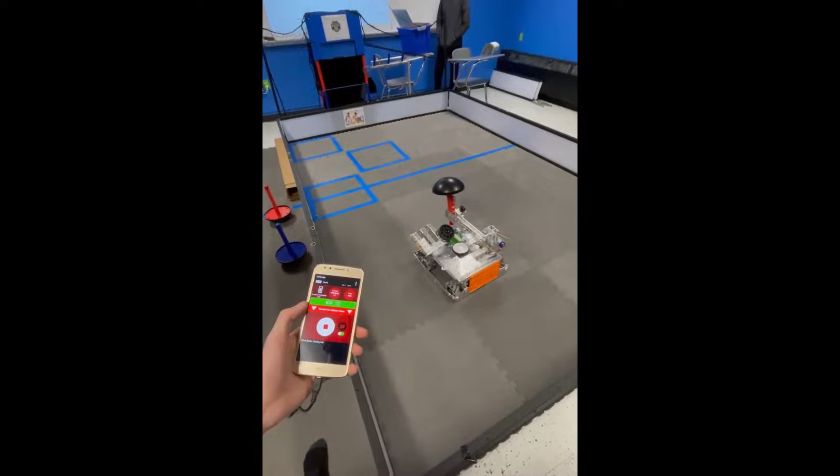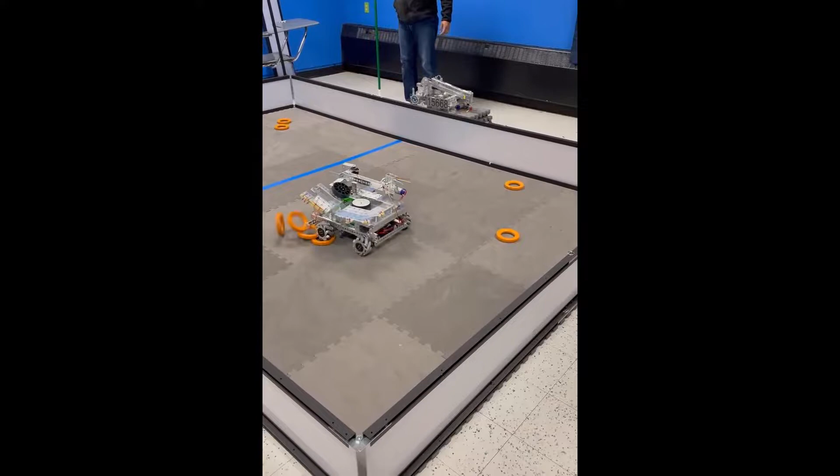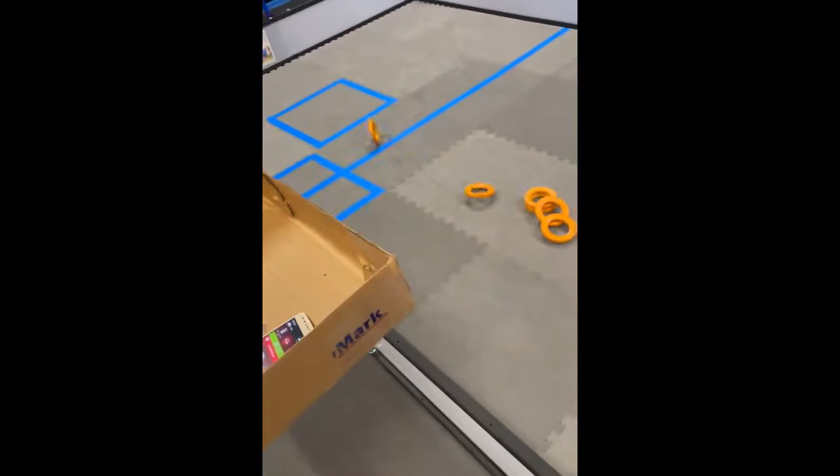Alright, time to watch Disaster Strike. Where's that going? Ram. Okay, I need to go faster than that. Wait, but it might stop. It might stop. Okay. Oh no. Disaster! Disaster already!

Hagerswood Middle School is Rithik Kurup and Chase Creedon. We're former grads, and now we're members of the robotics team for Xavier High School. Our team, the Full Metal Peregrines, Team 17703, are excited to present to you our robot, Monty.

Let's start with talking about what FIRST is. Xavier High School is part of a worldwide robotics league called FIRST, formally known as For Inspiration and Recognition of Science and Technology, which has yearly competitions in 4 different leagues: FLL Junior, FLL, FTC, and FRC. FTC and FRC are the middle school and high school level, FTC being the smaller robots and FRC being the larger robots. Xavier usually has 2 FTC teams and 1 FRC team, but due to COVID restrictions, the school instead consists of 5 FTC teams, the Peregrines being one of them.

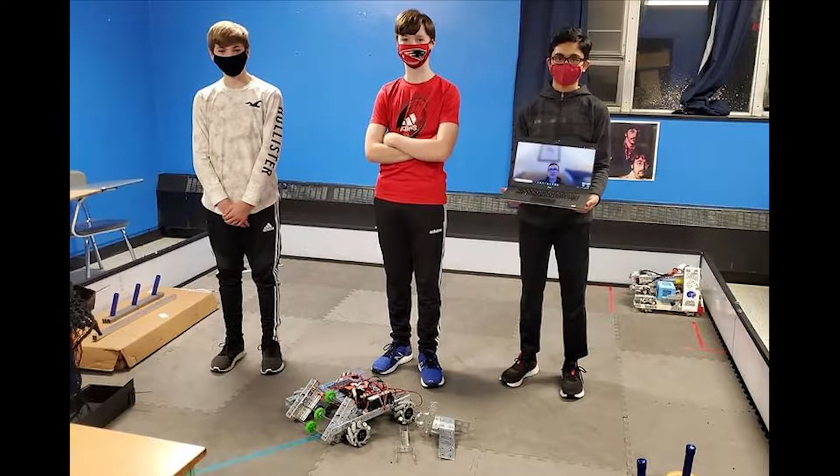For this year's FTC challenge, the robot has to pick up rings and shoot them into different goals, while also picking up a wobble goal and dropping it over a wall. The competition consists of an autonomous period where the robot shoots rings and drops the wobble goal on its own using pre-written programming, and a driver-controlled period where we drive the robot, shoot the rings, and drop the wobble goals ourselves.

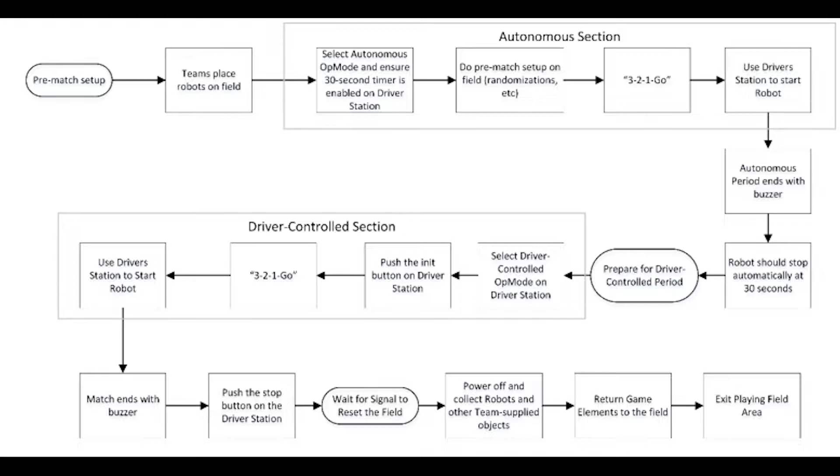The maximum robot dimensions in FTC are 18 inches by 18 inches by 18 inches, while FRC's is 3 feet by 3 feet by 3 feet. There are 3 periods during a match: autonomous, driver-controlled, also known as teleop, and endgame, adding up to 2 minutes and 30 seconds of robot mania.

Autonomous is the robot running by itself to shoot rings through the targets and drop the wobble goal in the indicated zone on the field. The driver-controlled period is pretty straightforward. It is when the drivers control the robot to shoot the rings through the targets. Endgame period is the final 30 seconds of the driver-controlled period. In this period, the drivers control the robot to pick up the wobble goals and move them outside the field.

Gonna have about 10 seconds remaining.

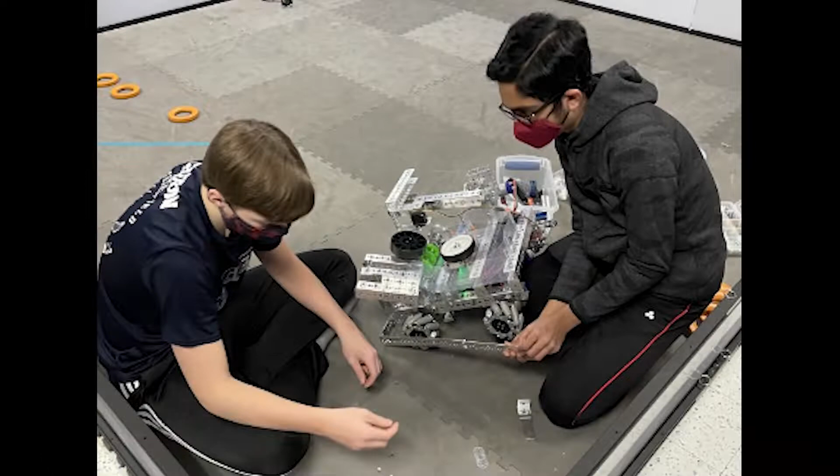The Full Metal Peregrines have decided to name their robot M.O.N.T.E, which stands for Mobile Omnidirectional Neutralization and Termination Eradicator. We were debating on calling our robot Troubleshooter due to how many issues we were having in the early stages of our build. Our build and programming process of M.O.N.T.E took about 4 months to complete, programming taking up most of that time.

So this is the CAD, or computer-aided design, of our robot. Before we actually build the robot, what we do is we create a CAD, a computer-aided design. What this is, it's basically a 3D model of what we're planning to build. That way we have an idea of what we're going to do before we actually do it, and we can see any problems that we might run into ahead of time, and that just makes the whole build process more efficient.

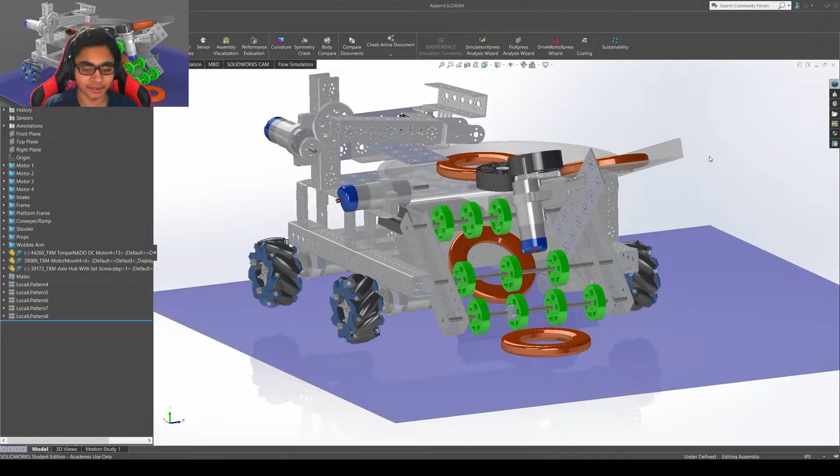You may have had a Tinkercad station in your tech ed class. I remember one being there. Tinkercad is the more basic version of this. This is SolidWorks, which is like a professional version of CAD.

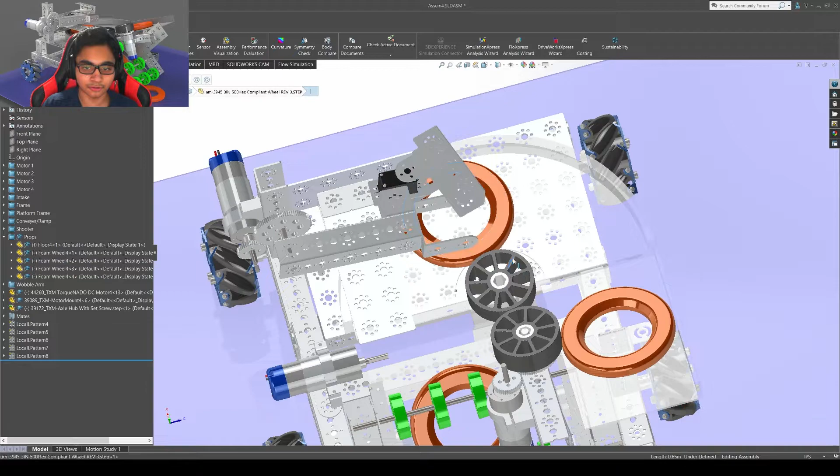So here, what we have is our intake of the robot. It's these green wheels that push the ring up, this little ramp. Then we have the hopper. This is where the rings are stored. And this wheel over here, when it turns, it brings the ring around to the shooter. For the shooter, we have a wheel that spins really fast, and when the wheel touches the ring, it goes flying off, and then we get to shoot it into the goal.

In the video where I show the final robot design, you'll get a better idea of this, since this is the CAD, so it's not the final design.

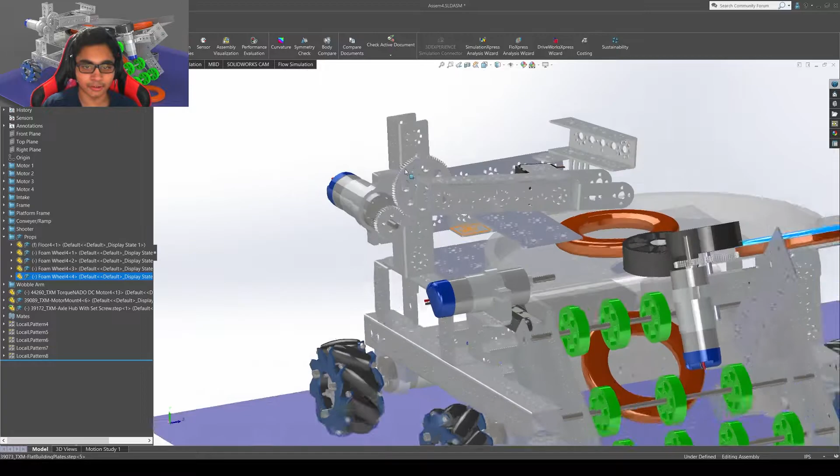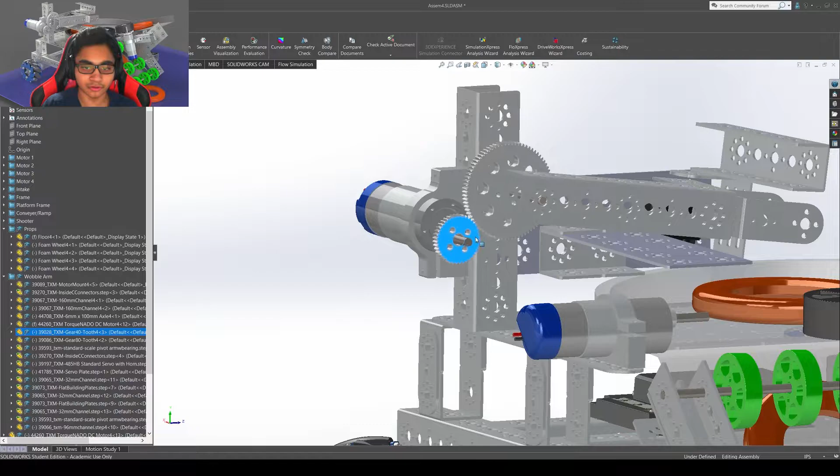Here we have the arm. This is what our original plan for the arm was. The final arm, as you will see in the next clip, is a lot different from this, because as we were building it, we found a way better solution for picking up the wobble goal. But what this was is, we have these two gears here that turn. When the motor turns this one, it moves this entire arm out. Here we can pick up the wobble goal.

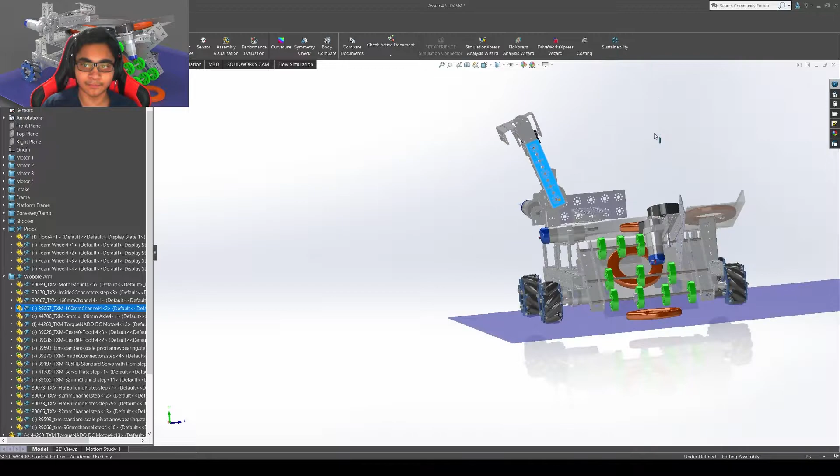So we have the servo that opens up with a channel attached. What the plan was for this arm was the wobble goal would go in between here and this would close, and then we could lift up the entire arm with the wobble goal in it, and we could bring it over the wall. And then after it would be done, it would just rest on this plate so it wouldn't be hanging out and it wouldn't get in the way of the hopper.

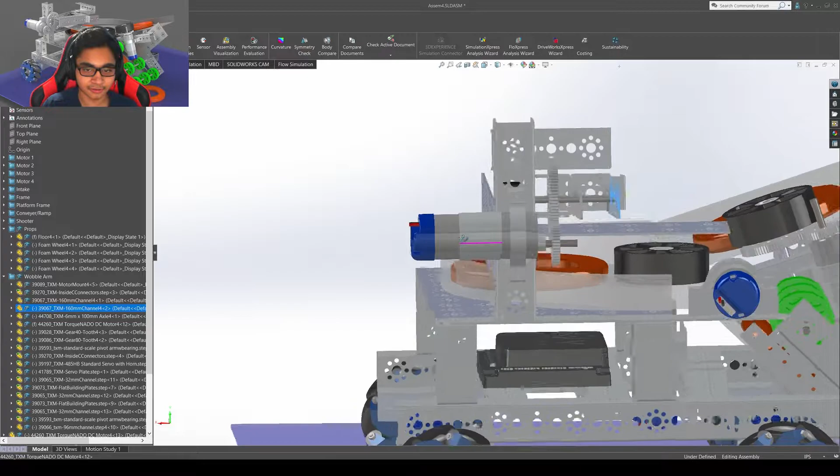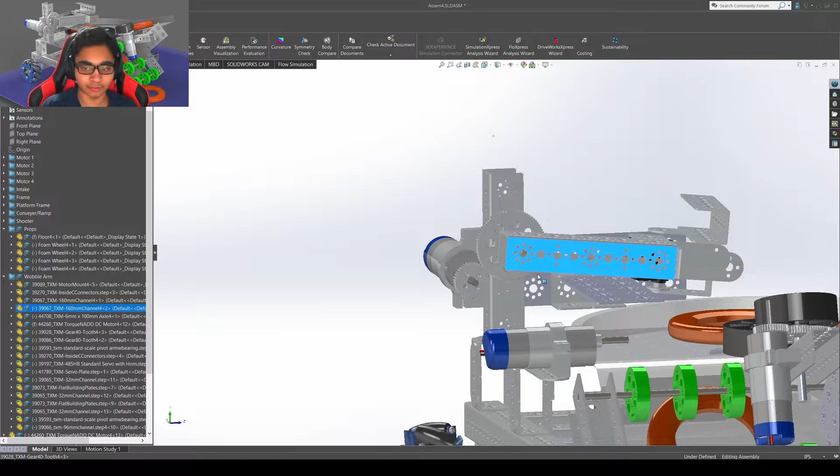Now, when we were actually building this, we realized that we didn't have this space, and we also didn't want this motor to be sticking out the back, because this was a structural hazard—if something bumps into that motor, it could cause all this to break. So what we ended up doing is changing it so the arm went back and forth instead of side to side. In the final design, we don't have this gear system; we have something else called a worm gear, which I'll explain in the other video showing the final design. This one wasn't as strong and wasn't able to lift up all of it, which is why we went with the final version, the worm gear.

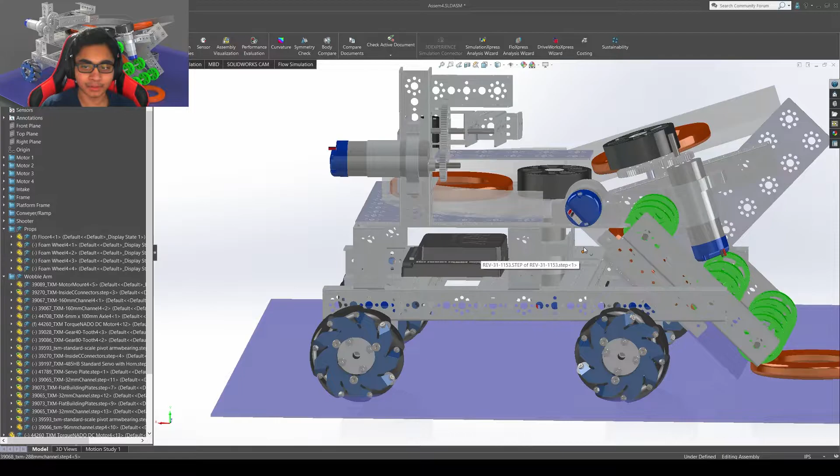Here, which you'll see kept in the final design, is a 2-floor system. Here we have the electronics—this is the rev hub, where all the code is stored, and it gives the commands to the motors. We'd have all the wiring down here. The second floor is where the hopper is, where the rings are, and it goes into the shooter.

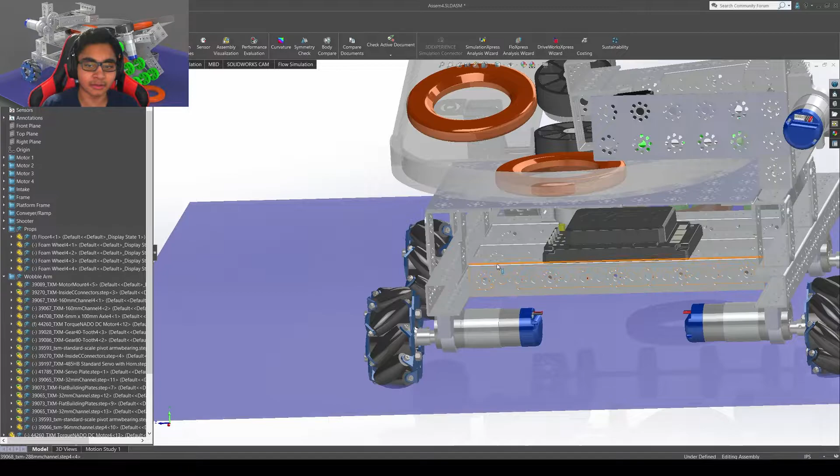Now again, this CAD version is pretty different from what our final one was, because as we were building it, we realized that having the whole structure attached like this, where the channels are next to each other, was not strong at all, because it would cause it to bend. So what we did is put these channels under these two, and over them as well, so that way it was a lot stronger. Our final robot is a lot thinner than this, so it easily fits within the size restraint when it comes to width, while this one was over, I'm pretty sure.

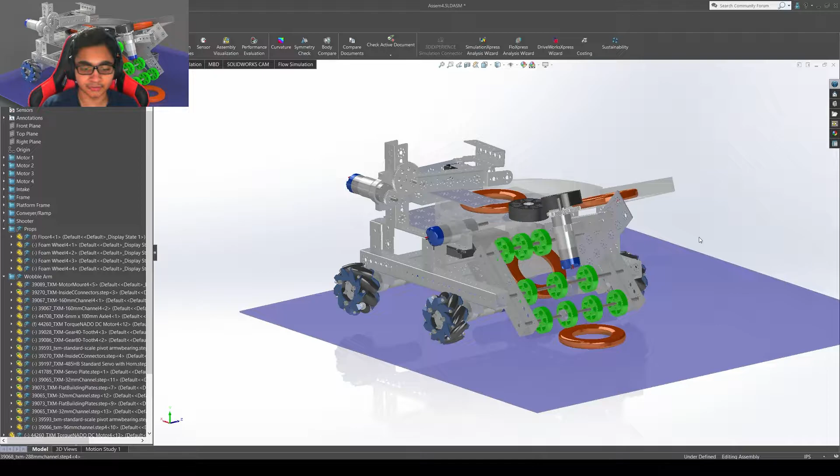So yeah, that is our CAD design. Now in the next video, I will show you the final design, where I'll explain what these wheels are, and go into more detail on how the whole shooting, intake, and hopper system works.

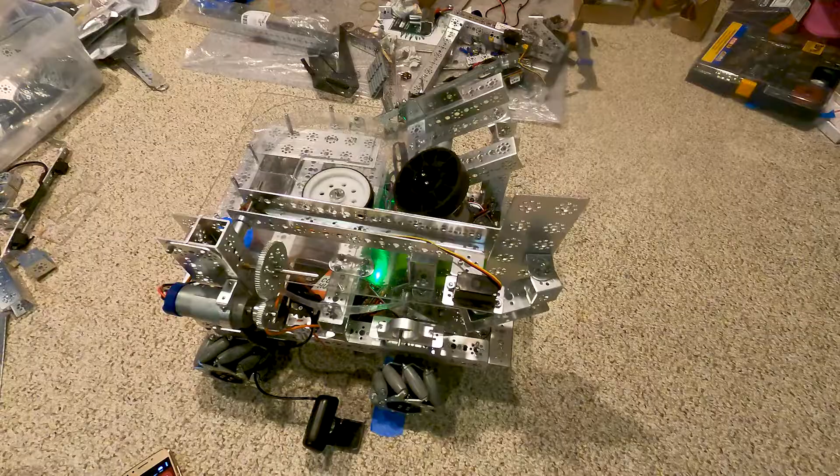Alright, so this is our actual robot. You can see it is very different from the CAD. It still has the intake, hopper, and shooter, like the same general idea, but the actual dimensions, the way we built it, is very different.

So first, I'm going to show the frame. As you can see here, the way we secured the frame is we had the two channels that had the wheels, and then we connected them by putting channels across, like the bottom and the top. Before, these things were next to them, and that wasn't as strong because it would bend. So now it's a lot stronger.

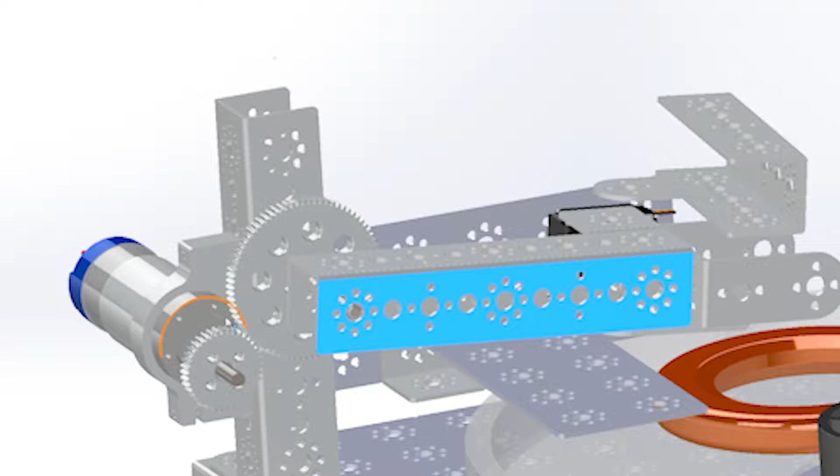Now the biggest thing we changed in the final design is the arm. Right now I'll show you what this new arm is like. The problem with the old arm design is that it wasn't very strong, and whenever we let go of the button to turn it on, it would just fall because there wasn't any power going to the motor anymore. So what we did instead is replace it with this thing called a worm gear.

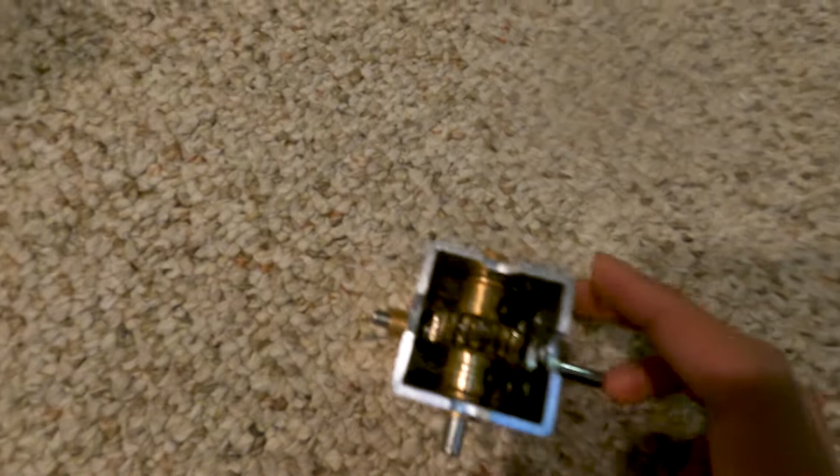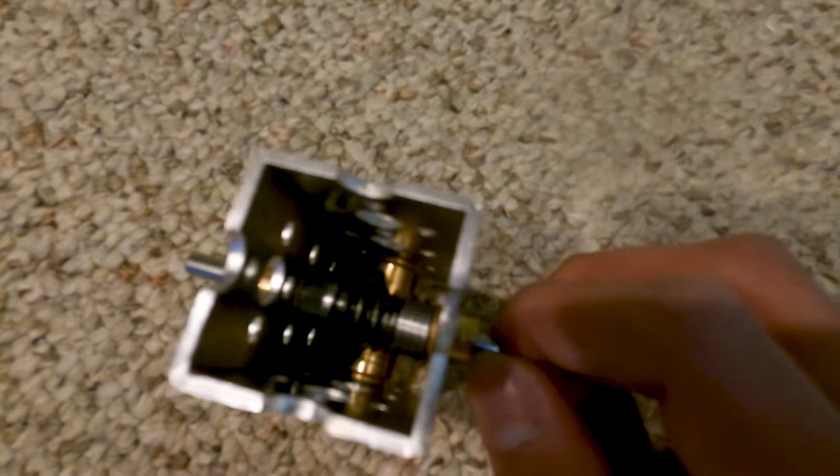Now a worm gear is a special type of gear where there's a corkscrew connected to the motor. This one will turn because the motor is connected to it. When this corkscrew turns, it slowly turns this gear over here—see, if I spin this, it spins the top gear. Now what's good about a worm gear is it only moves in one direction. If there's something heavy on this top gear, it won't move because the corkscrew won't allow it. It will only move from one direction. So this is a lot stronger.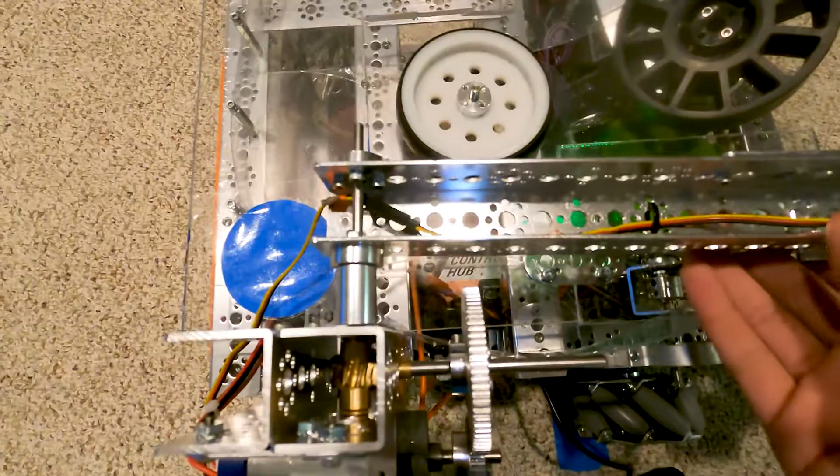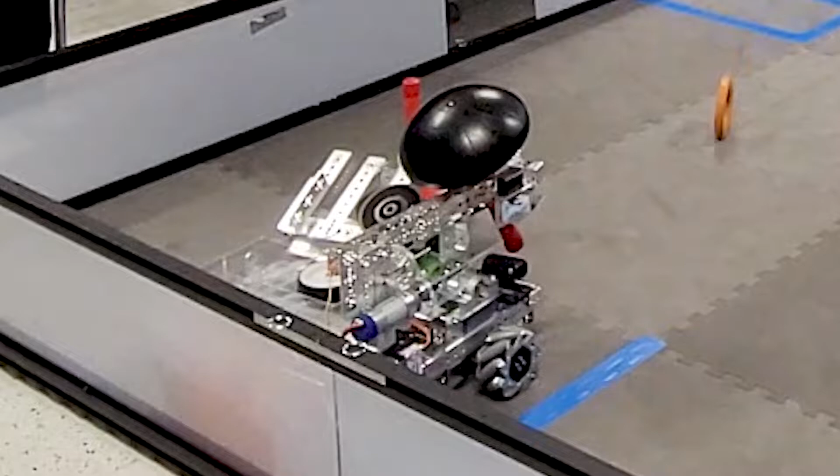So this is what we ended up doing for our final arm. We have a worm gear connected to the motor, and that is all connected to this arm. Now this arm's wrist is also pretty different because we needed a way to preload the wobble goal without having to pick it up—it could just hold it in place, because for the autonomous period it has to place it without picking it up. So it has to be on the robot before the match starts. That's why we have this new wrist over here.

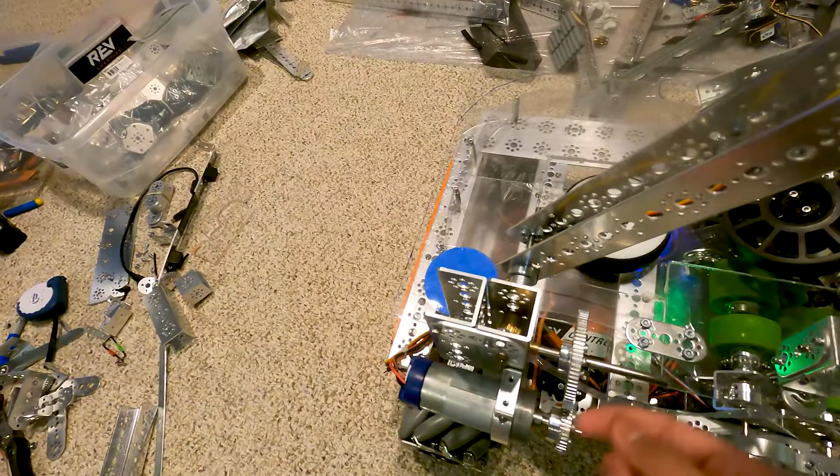As you can see, it's just a servo connected to this plate that moves like that. Unfortunately, I don't have a wobble goal here, so I can't show it in action, but I can show the arm itself moving. For the worm gear, if I move it, when I let go, because it can only be pushed from one direction, the arm is stuck like that. That's really helpful when we're picking up the wobble goal, because we don't have to hold down the button—we can just let go and it gets stuck there, so it can hold things in place mid-air.

And quickly I'll show what that looks like. This is the driver station. This phone is connected to the controllers and it sends the commands from the controller input to the rev hub that's in the robot. That's how we get the commands to the robot so we can drive it wirelessly.

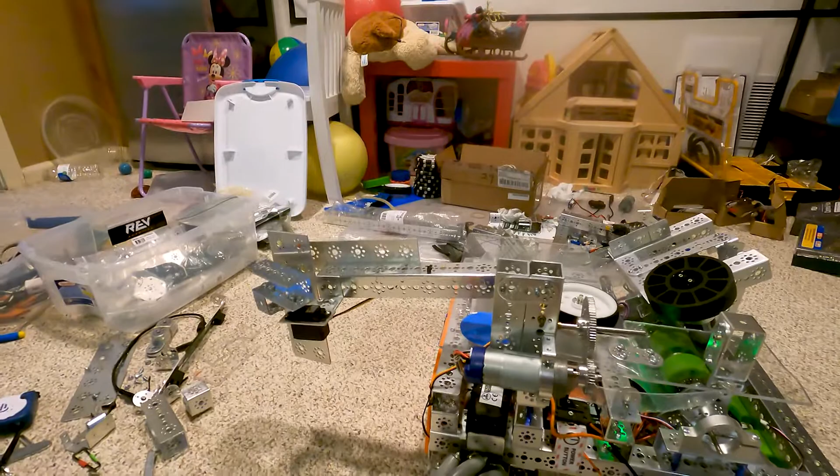Now if I play the code, the arm moves down like that. We open the wrist and we close it, and we just bring it back.

Now, a thing for this competition, as you can see from some of our fail videos at the beginning of the video, this worm gear setup, because of the weight of the arm itself, is very weak and tends to break during autonomous. In teleop, the driver control period, it's fine because we're manually controlling it, but in autonomous it runs pre-programmed code, so it tends to break the arm by itself, and there's nothing we can do to stop that.

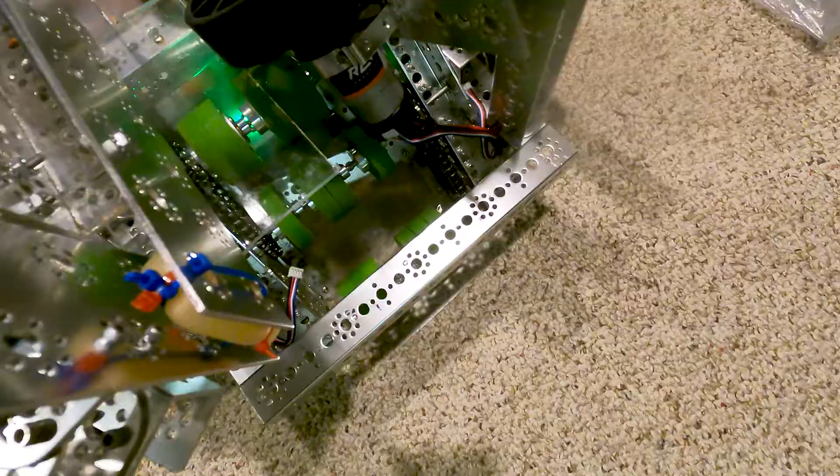We were able to fix this by making sure the arm was set up in a particular way that would prevent it from breaking. But for future competitions, as you can see, there's this bar here that isn't in the recordings of our match. We plan on putting a new arm here purely for autonomous, that holds the wobble goal on its own and drops it into the squares in the field, while this arm is only used for teleop. That way we can have a consistent autonomous wobble goal without worrying about it breaking.

Alright, so that's our arm. I want to go into some detail on the wheels.

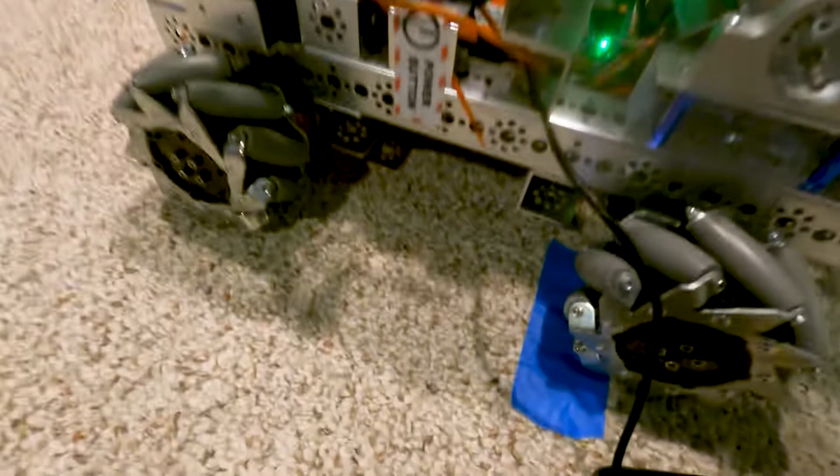If you don't know what these are, they're called mecanum wheels. They're wheels that have rollers on them. What these wheels allow you to do is if this wheel and this wheel move in one direction, and these two move in the other direction, it allows the robot to slide left to right. You'll see in our recordings of the match, our robot can slide side to side when we aim, and that's really helpful because it makes aiming a lot quicker and more efficient, so we can score more points in less time.

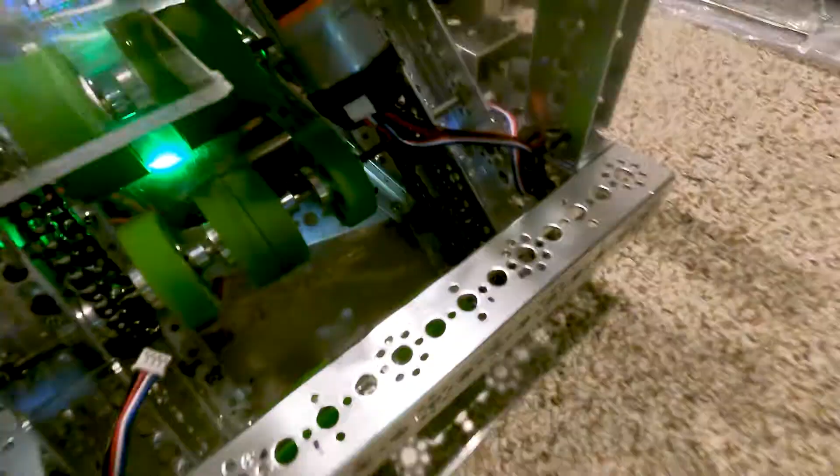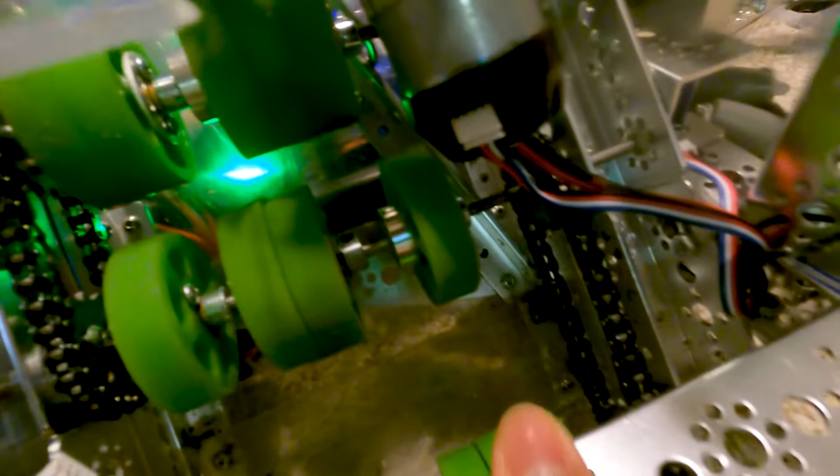Now I'm going to go into detail on the intake. There's a bit of stuff in the way, but the intake is this one motor on this side, and it's connected to this top axle with these green wheels on them. These wheels are called compliant wheels — they're kind of squishy and grip onto the rings really well. That one motor is directly connected to the top axle, and then that axle is chained to this middle axle, and then that axle is chained to the bottom one. So when they're all chained together, when the motor turns on, all of them move. This allows us to intake the rings — they suck in the ring from the bottom and bring it up through the intake.

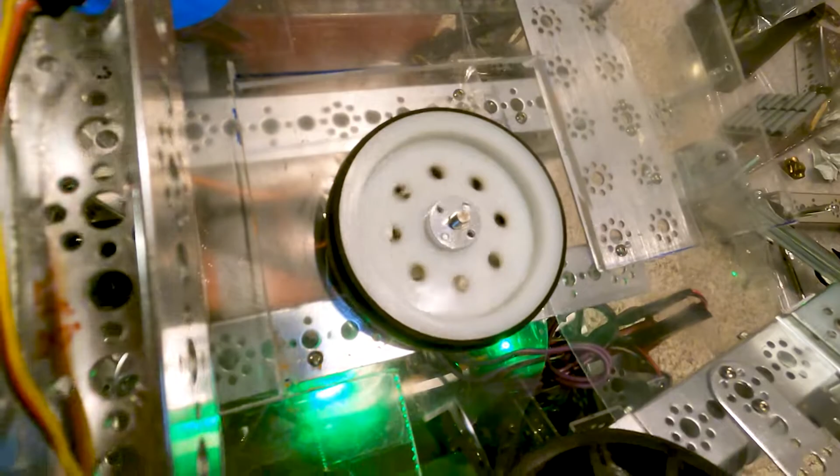And then we have this hopper wheel. What this wheel does, when you turn it on, it takes the ring from the intake, turns it around, and then puts it into the shooter. And the shooter is just a really fast wheel that shoots the ring really quickly. I have a little target over there so you can see how far it can shoot.

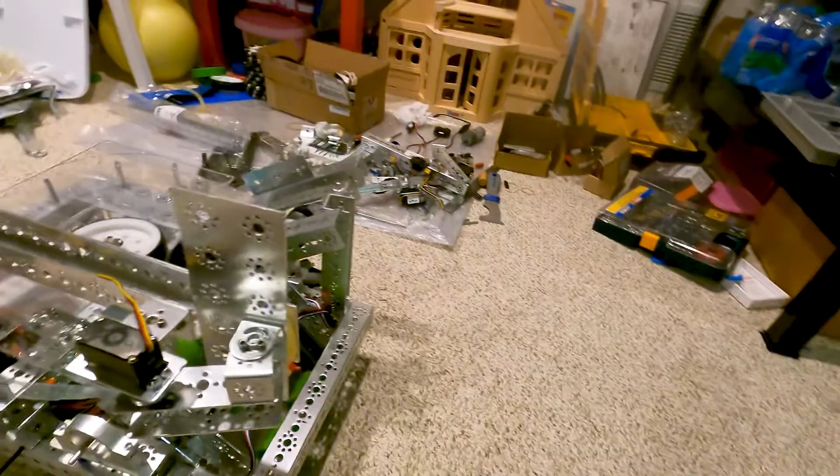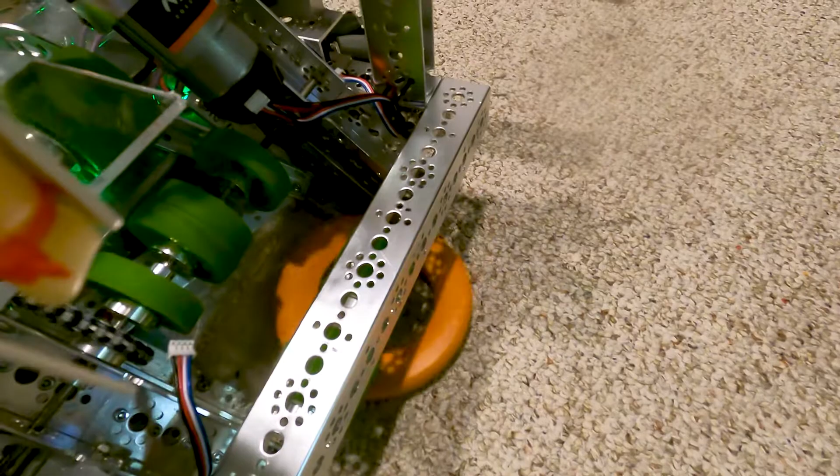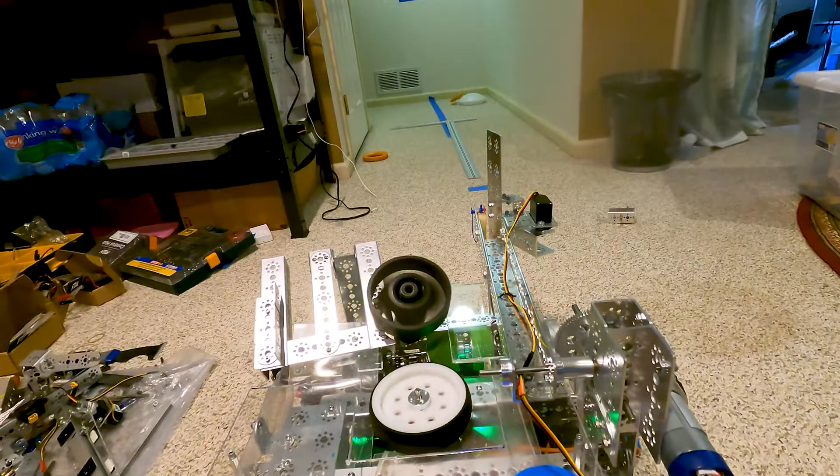I'm going to quickly demonstrate the robot sucking in a ring and shooting it. So I have a ring there, I'm going to just put it right in front of the intake. Once I suck it in, it is now there, so I have to ramp up the shooter. And then it shoots it. I'll show a better angle so you can see how far it can shoot. So yeah, that's our intake and shooting.

Hi guys, I'm Aiden Pesh. I'm the lead programmer for the Peregrines. Today I'm going to be telling you about the basics of programming a robot.

When we start off on our programming journey, we have to learn the basics, and we do this by exploring FTC Simulator. This is an application that allows us to understand the basic concepts behind programming a robot, such as making a robot move by itself and assigning controls to an Xbox controller that allows the user to control the robot later on.

Once we have those concepts mastered, we move on to Android Studio, the application we use to actually program our robot. In Android Studio, we write code so the robot can perform various tasks, whether it's the user controlling the robot or the robot actually controlling itself.

In this year's game, there are a whole bunch of tasks for us to complete, and our robot is able to shoot discs all by itself. It's able to use vision to recognize what a stack of rings looks like, and then, depending on what it sees, it has to go to a certain area, and once it reaches that area, it has to drop the wobble goal all by itself. And to make things even more complicated, once it drops a wobble goal, it has to return to the parking line just so we get extra points.

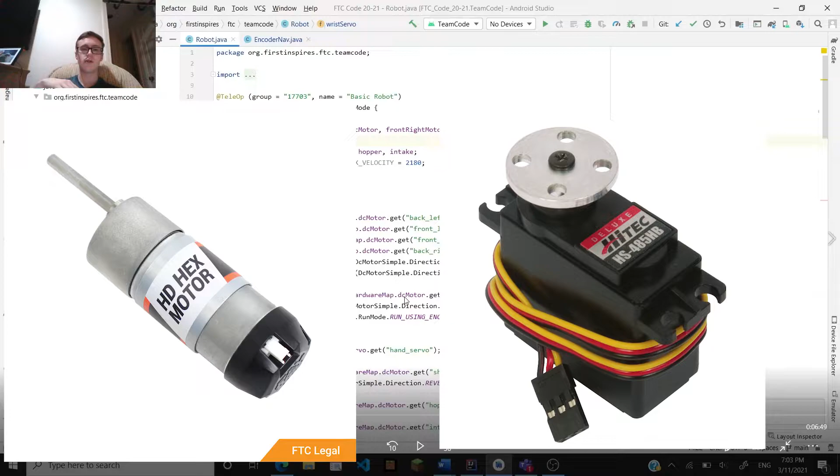Down here, we have our main method, which is called run_op_mode. Every class needs a run_op_mode method. In here, we declare our variables, assigning the special motors to the motor variables that we had created earlier. Similarly, we do this with the servos, the shooters, hopper, and the intake. Altogether, this allows our robot to get the proper stuff and then to run.

Wait for start means that this code will not run until the user presses the start button on the phone, also known as the driver station. Once that happens, this telemetry statement will be displayed. Telemetry is data that is displayed on the phone, telling the user what's going on with the robot.

Down here, we have 3 different variables. We have power strafe, power forward, and power turn, which we set to intake values from the joysticks on an Xbox controller. What this then does is, using a specific formula for a mecanum drive, our robot can move when our drivers use the Xbox controller.

If we press left trigger, it will move super slow. If we press right trigger, it will move at a medium speed. And if we don't press anything, it will move at normal speed.